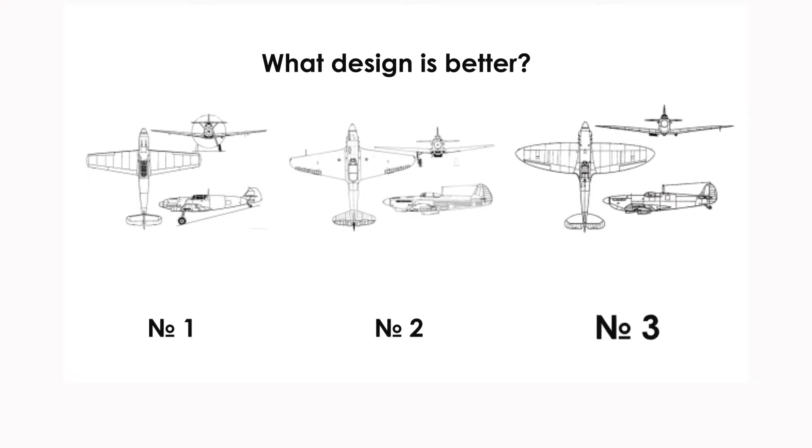Yeah, it was number 3, the legendary British Spitfire. Excellent aerodynamics, performance due to elegant curves of the body. Now, what do you think? Which one was easy to manufacture, to produce, to assemble?

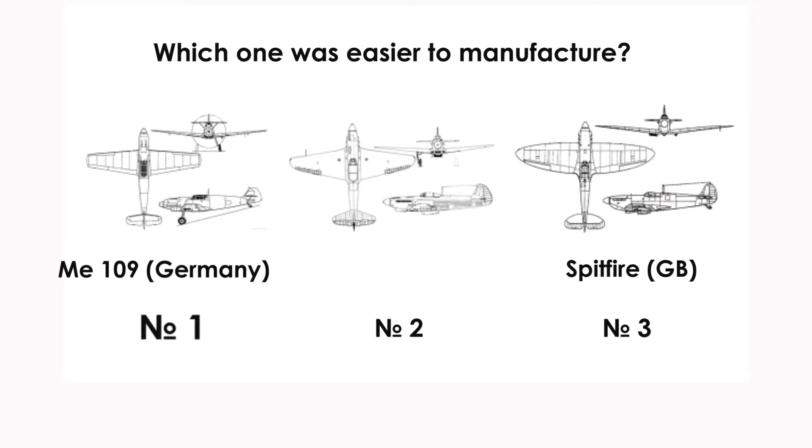Right, that was number 1, German Messerschmitt 109. Straight lines, square elements, flat glass on the cockpit, and the cannon that could now fire through the hollow propeller. It made it the classic of DFMA.

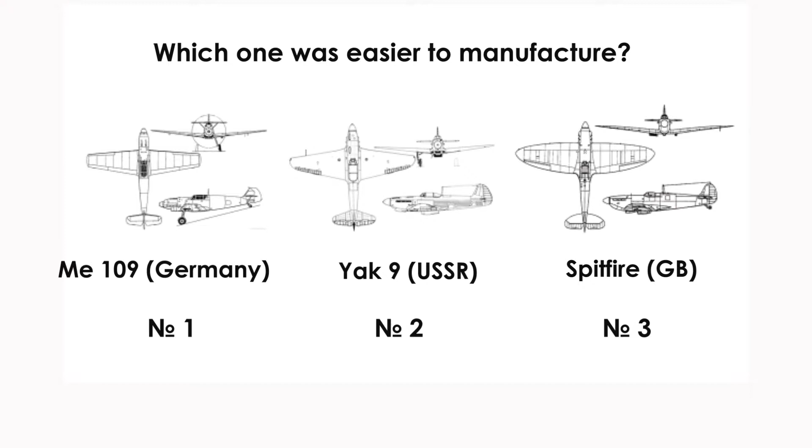The consequences were really impressive. And here are the numbers. Messerschmitt required just 1/3 of Spitfire time to be manufactured. 1/3. Thus, there were almost twice more Messerschmitts in the sky produced over an even shorter period of time.

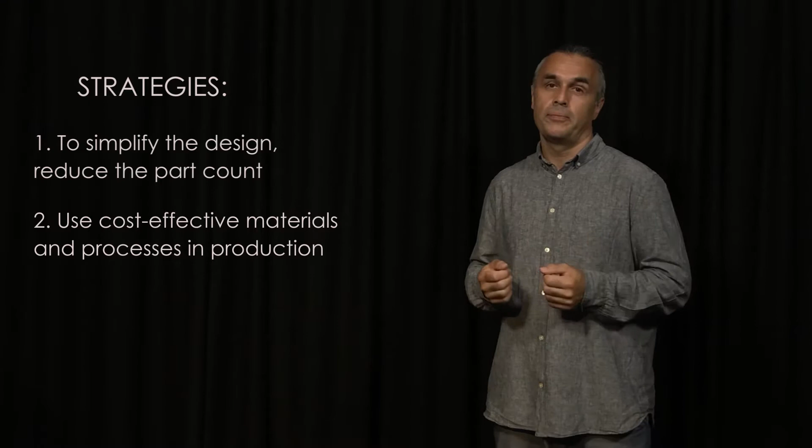How to make a system more manufacturing friendly? There are 3 strategies that are quite obvious. First, we have to simplify the design. We have to reduce the part count. That is completely overlapping with the trimming exercise and the goal of trimming from TRIZ. Second, we have to use cost-effective materials and cost-effective processes in production. And the third, we have to minimize the complexity of manufacturing and assembling operations.

Let us develop it a little bit more. If we focus on a specific component, one element of our design, we can reduce assembling time if we, first, eliminate or minimize tangling between parts in the feeder, so it is easy to pick up. Second, we can make it symmetric. Symmetry will reduce orientation time during handling. And the third, if symmetry is not possible, we can use obvious features to speed orientation. For example, we can magnetize, we can put markers.

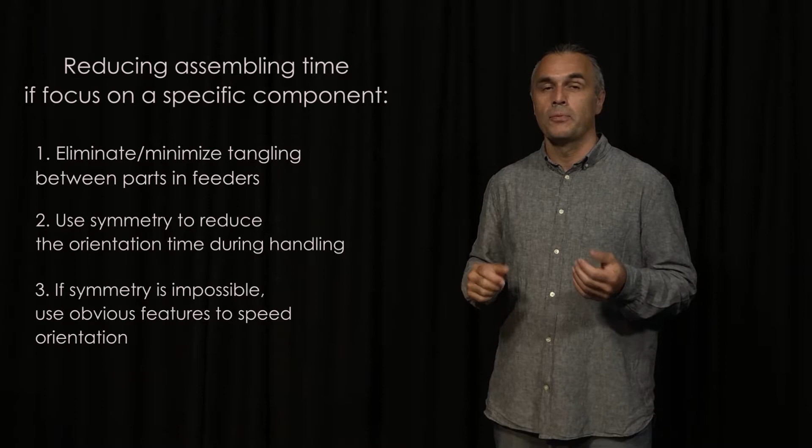We can also have a quick checklist just to check if we need the part as a separate element at all. Question 1: does the component move with respect to other parts that have already been assembled? And question 2: must the part be made from a different material or isolated from all other parts already assembled? If the part does not meet any of these 2 criteria, it is a candidate for elimination or consolidation. That means merging with other parts. They can be one.

If we focus on the system as a whole, there is another DFMA checklist. 6 points. First, reduce the number of parts when possible. Remember trimming. Second, build the part in layers from the bottom to the top using gravity to locate parts. So it is easy, thanks to gravity, to put them one after another. Think of sub-assembling. Third, have already assembled products stable on the workspace.

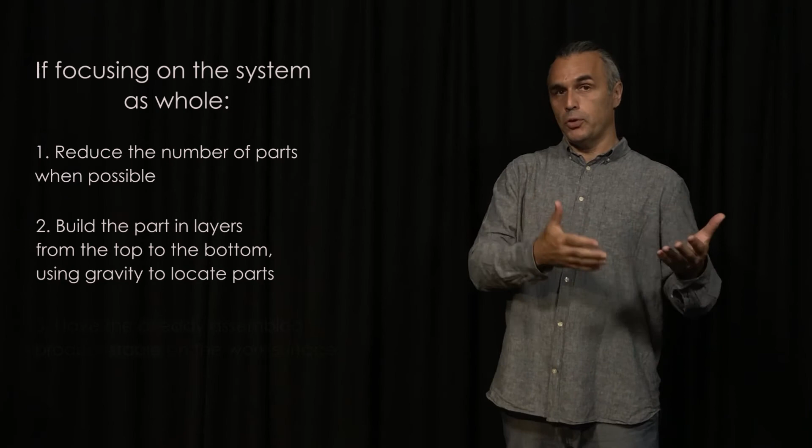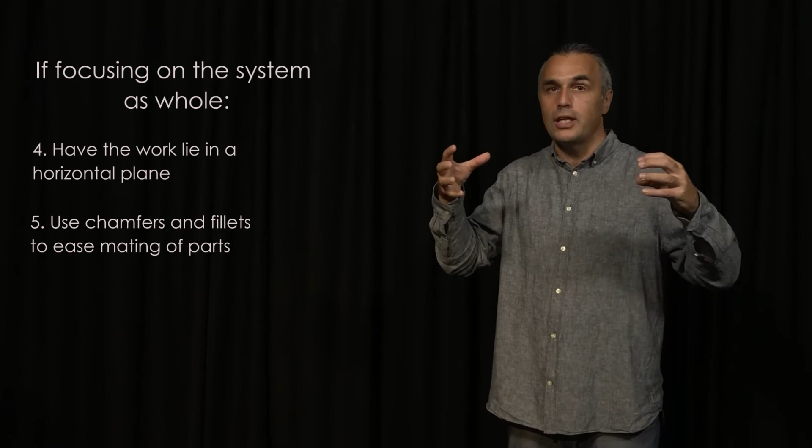For example, magnetize. Fourth, have the work lie in a horizontal plane, so it is easy to move in the workspace. Equipotentiality. Fifth, use chamfers and fillets to ease mating of parts, so it is easy. It is coming to each other itself. And the last one, use snap fits, click systems, and other quick fasteners, avoiding screws, glue, welding, and so on.